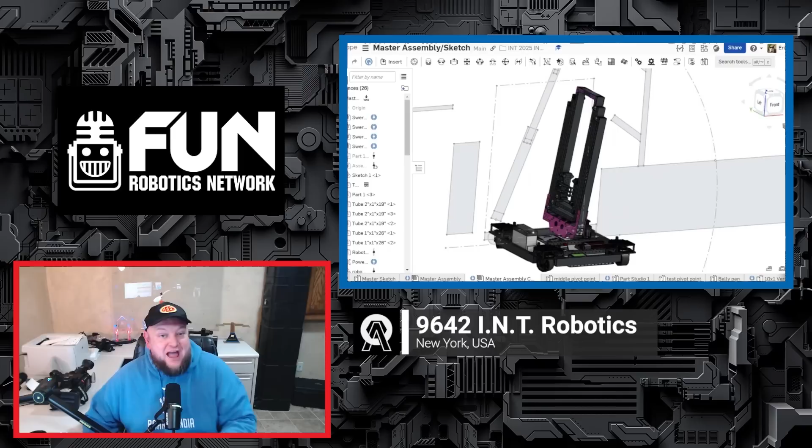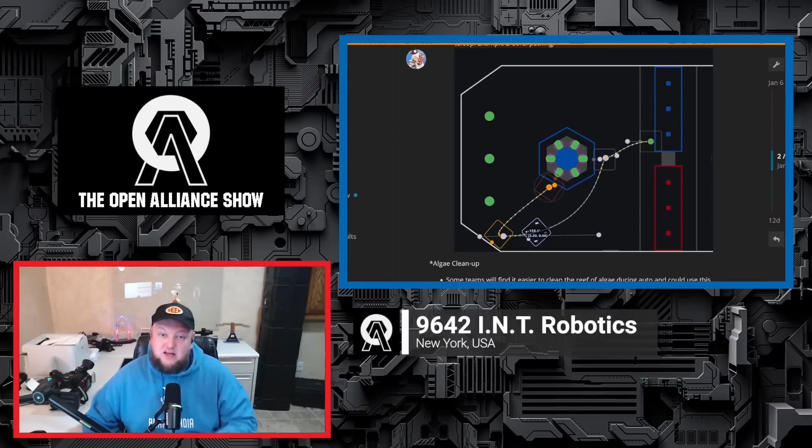They're also here for FRC as well, giving updates on what they've been doing for the REEFSCAPE game. This team definitely you would never assume is a second-year team. They are so well put together, and it's going to be really cool to dive into what they're doing. We're talking about their robot progress so far, an update on their chassis. They have a lot of great stuff in CAD we'll be diving into, plus some good concepts for their climber and where they're getting inspiration from. We also talk about their ideas for a neural network and custom vision setups. It's a lot of great stuff coming from INT Robotics out of New York. Let's learn more about their progress coming up here on the FRC Open Alliance Show.

Sure, my name is Andrew. I'm the co-captain of INT Robotics, and I cover CAD and mechanical. I'm the other co-captain of INT, I cover programming, machining, and electrical. My name is Darius, I'm the design and mechanical lead for INT Robotics. And my name is Eric.

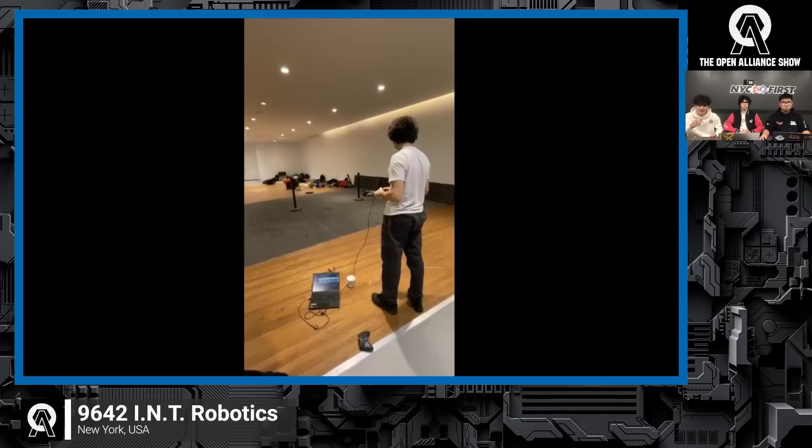Starting off, we just want to go back to day one. Once we saw the game, we immediately started creating a chassis. We started with a 27 by 27 chassis and got VersaFrame on the CNC as quick as we could. Then we built a full test chassis, which we have video of. These are actually new swerve modules we have, a lot faster than our old ones, and brand new instead of being used for multiple years. It's great to drive with a new chassis, and this allowed our programmer to get some testing early on in the season.

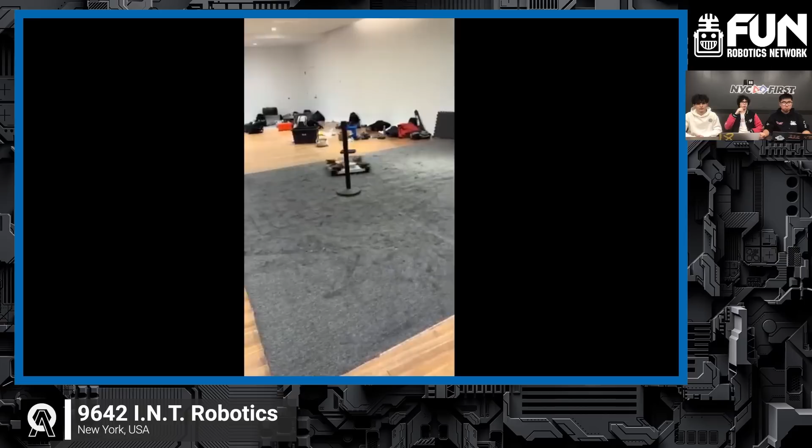Going more in depth into the chassis, because they're new not just for us but across FRC, these are the West Coast Products X2 Inverted modules. We're specifically using the X3 gear ratio. I believe we have the fastest gear ratio option, but right now we've geared them to the second fastest just because we want to see what it's all about. And as the video shows, it's pretty damn powerful.

So while Darius is working on the programming side of the robot, the rest of us split into different teams, working on different intake designs, different climber designs, and different versions of the chassis. We have a 27 by 27 and a 27 by 28. While people were working on the different intake designs, we narrowed it down to a couple, and same for the climber, we have a couple main options and one that we're leaning towards. So we'll move into the elevator system, which Eric will talk about.

Yeah, so kind of backtracking a little bit to our chassis.

So the test chassis that you saw in the video was a 27 by 27. But after further discussion with the team, we decided to finalize with a 28-inch by 20-inch chassis. The reason was we didn't see a need for such a large chassis this year, since there weren't many mechanisms we needed to cram into the space. 20 by 28 turned out to be a perfect middle ground, giving us enough room for all our mechanisms plus ample space for electronics.

Diving into our individual mechanisms, I want to first talk about our overall vision for the robot this year. When thinking about game strategy, we wanted to take on all the tasks, and our elevator was going to be the main system that allowed us to do that. So for the elevator, we decided to go with an internally belt-routed elevator.

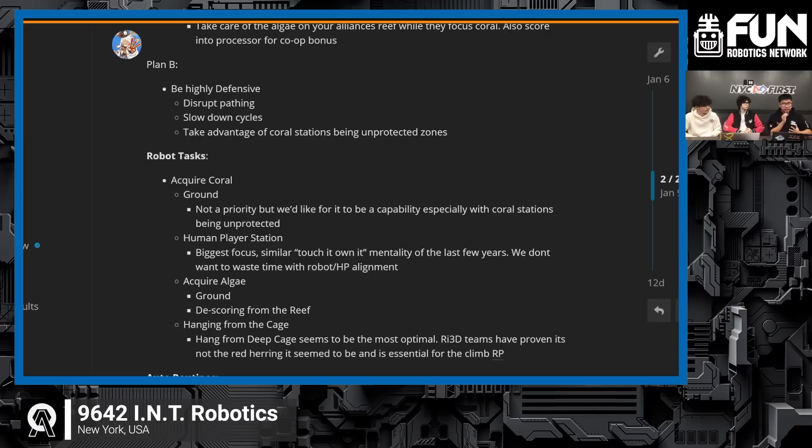There were a couple reasons for this decision. One of the main reasons was the weight—it's much lighter than a typical chain cascading elevator. This is significant because we realized we have less weight to work with this year, so we're being more mindful of weight, and that's one of the reasons we chose the belt elevator.

Another reason was its low maintenance. Once you tension all the belts and finalize everything, there isn't much you have to do to maintain it. It's low maintenance and gives us ease of mind when driving around.

Something I want to ask you guys—we were talking pre-show that you just got back from an FTC event, right? What's that transition like going from FTC to FRC in terms of pacing or strategy? You all do both, so what is that experience actually like?

It comes with its ups and its downs. I think we're much more organized than we were last year, our rookie year, since it was rookie year for both our FTC teams and our FRC team. That was very chaotic—we didn't get to where we are right now. We didn't even start building until about a month into build season.

Right now I think it's good. We've managed to organize our time because we have members of the FRC team who are native to their own FTC teams from schools that don't have FRC teams, which is why they compete with us in FTC. We found a system that works, and honestly I think it's more beneficial—besides the time constraints of giving up weekends for qualifiers and other FTC events.

It actually helps more, because from a programming perspective, the stuff I've done in vision for FTC, working at a smaller scale, is still all the same concepts. Everything I talked about in the earlier FTC Open Alliance segments is stuff I'm going to be implementing here in FRC.

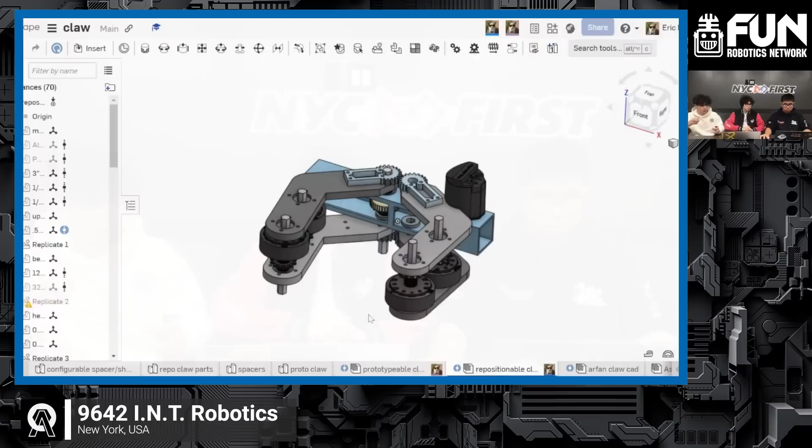What else do you want to cover? Moving into our different intake designs, we came down to two main ones. One of them has two rollers on either side, and it's able to open and close to adapt to the game piece.

The other one is more of a static design, so it more so pinches the game piece, the algae, the larger ball, when compared to the PVC pipe, where it gets intake nice and snug and the algae gets pinched in. So there are two different designs. They're pretty much the same type of concept, however, one of them is more adaptable to the different types of tasks. It might handle the ball easier. We haven't actually tested it physically, and that's what we're going to get to in the coming weeks. But these are our different designs in terms of CAD for our two intakes.

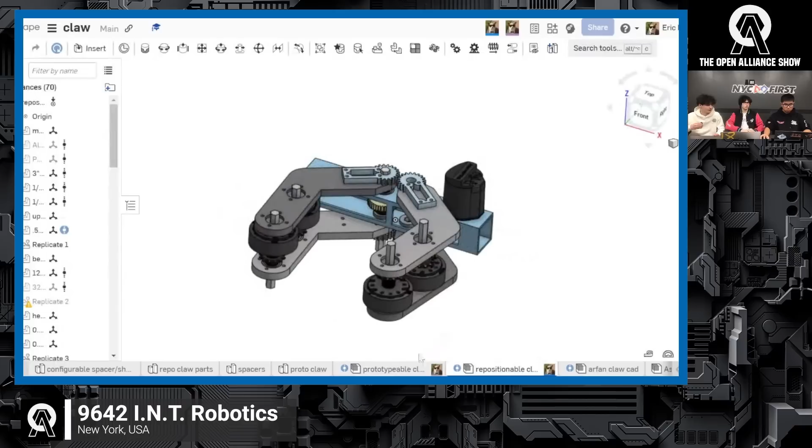And then if you want to move on to the climb or the elevator. So this is our differential, which Eric can talk about.

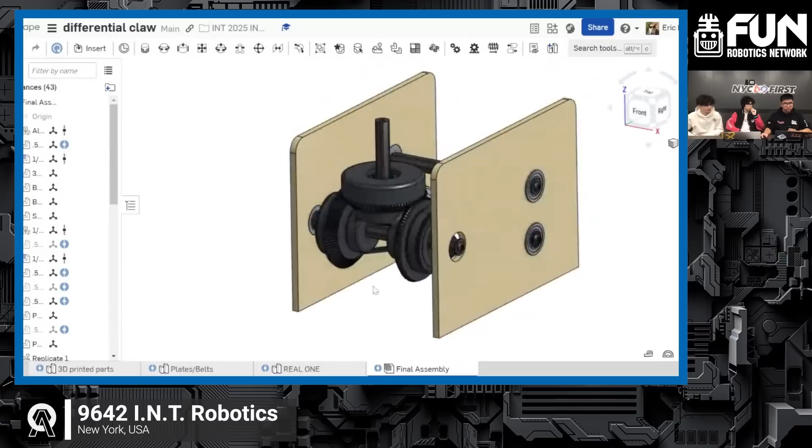Yeah, so another mechanism we were playing around with was a differential claw. I actually saw this design on Instagram one day, a team using a similar mechanism, and we designed an elementary version of this. We're still yet to test it, but we have high hopes because it's very compact, and we're able to have two degrees of motion. We have up and down, and we also have 360 degrees around this axis right here.

So this is our master assembly slash master sketch document, and here is where we do a lot of the planning and where we'll eventually visualize the final assembly of the robot. So here is our master sketch. Originally we decided to go with the elevator in the back, and the belt elevator would go to all four levels of the coral on the reef, and you can kind of see that here in the master assembly.

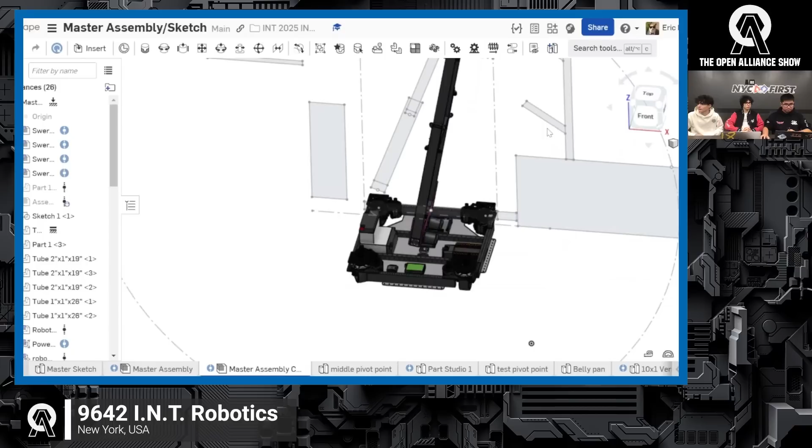With this elevator we're able to reach all four levels. So we have the top level here, we have that preset, and then when we need to go down, we would simply go down to the lower levels.

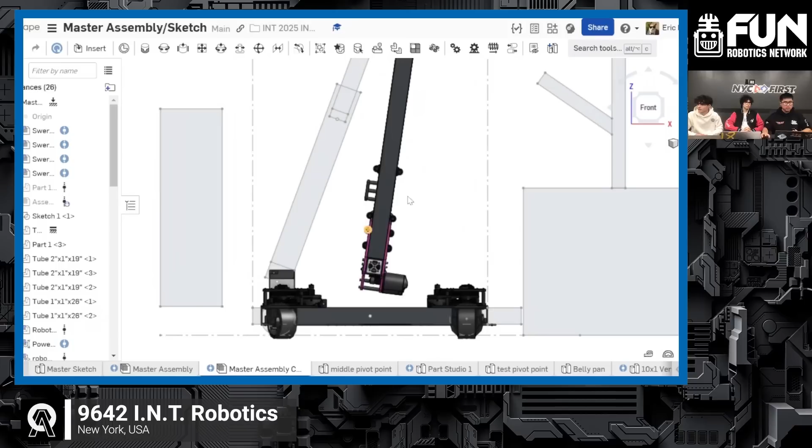And so forth. We also decided to put the elevator in the middle. As you can see before, we had the original idea of putting it in the back, but because of possible weight distribution issues, we figured that having it in the center would always establish that our center of mass is near the center and would prevent tipping.

Just to specifically reference a team we took inspiration from, we do agree that having the elevator pivot from the back would probably make for an easier time climbing because we have more leverage. But we're trying to think of auto and teleop as a whole. We don't want any sort of tippiness because we don't want to slow ourselves down just because if we move too fast while even slightly extended, we'll be tipping. That's not a problem we want to deal with.

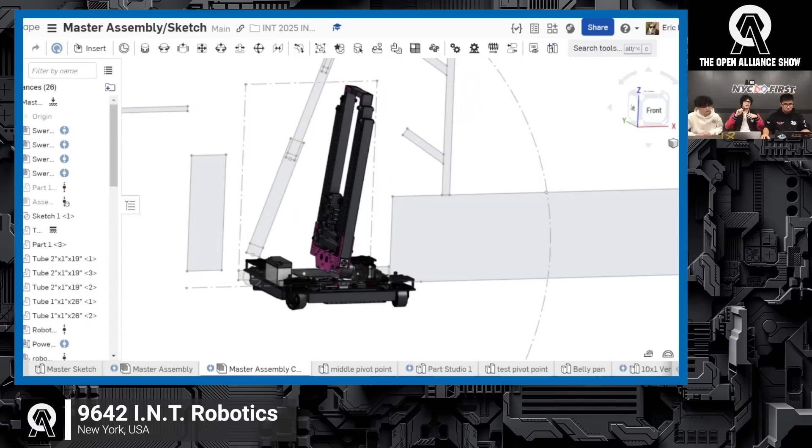But we've seen two robots, at least in 2023, successfully execute a similar concept, 1768 and 3015 Robo Rangers, I believe, where they had a pivoting telescoping arm in the middle of the robot. What I really liked about this design, obviously we're not going to go with a telescoping arm, we're going to port it to be compatible with an elevator. But what I personally liked about this design is that another goal we had is that we wanted ground intake.

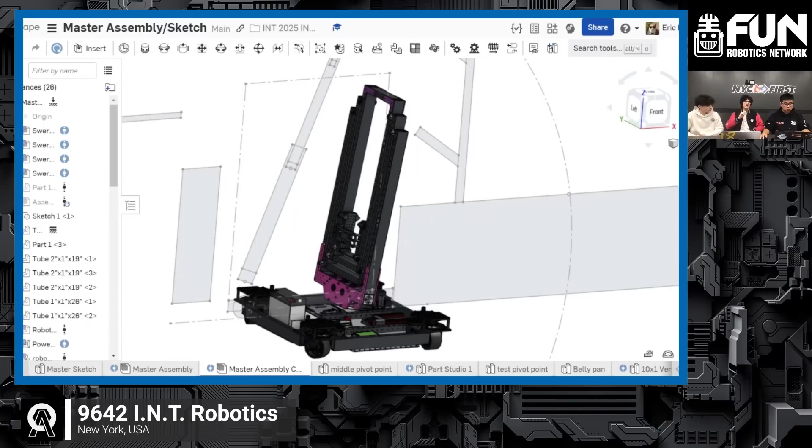While we understand that in some games, especially 2019 Deep Space, ground intake might have come off as a red herring, I don't think that's the case in this game, especially because the human player stations are not protected. So at higher levels of gameplay, especially at worlds, you're going to see people playing some crazy defense on the human player station, and we want an alternative where a human player just starts shooting out coral and they disperse in different directions. The person playing defense isn't going to be able to keep up with all of them. And we have the capability to, just like how 3015 did, pivot our elevator down.

Because the intake and the claw that we'll have will, at least, even if it's not through a differential, have 1 degree of motion where it can pitch itself up and down, we'd easily be able to pick up from the floor. And that wouldn't have to be a separate mechanism or anything like that. It's already synergizing well with our pre-existing mechanism of having a pivoting elevator.

So is that claw that you're designing, or the different options that you have, are those looking at picking up both algae and coral? Yeah, realistically speaking, we want to have something that can do algae and coral in the same string.

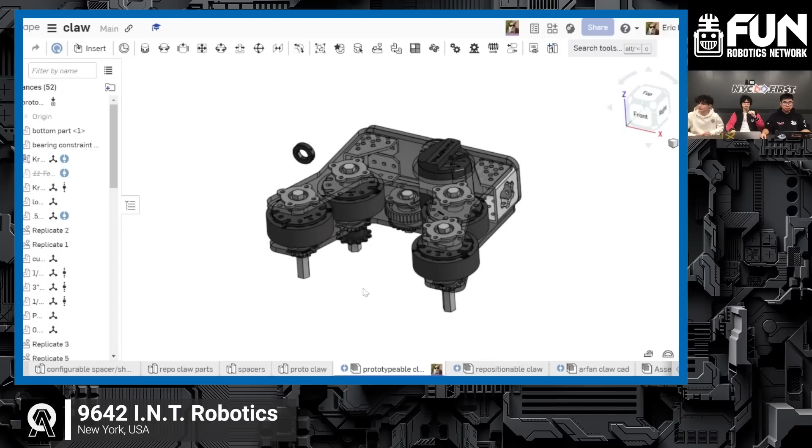Gotcha, so yeah, that'll be really interesting to see. I agree with you, I think floor pickup's going to have a lot of viability in the game, especially in later levels of it. I agree, as the way the meta evolves in this game, I think floor pickup's going to be a very valuable asset for teams to have as well too.

So yeah, cool price. Anything that you guys have considered in terms of climbing or anything like that yet? Yeah, so we also have a couple of climbing ideas in mind.

So one of them is actually inspired by a Lego robot that we saw very early in the build season. That one was pretty much using a conveyor system where the actual cage lands on top of your robot and you're clasping onto it, pulling yourself up with that, which we'll pull up real quick right now. This was something that we all saw very early on.

It was an idea that has now evolved into many different types, where we use the same type of wedge idea, but now since we have the elevator, which is on a pivot, we were able to have the ability to maybe use the elevator and have an actual clamp on the elevator to pull ourselves up using that instead.

So this is just a very early concept of something that we saw where we could take inspiration from. But now what we're moving towards is something where, if you go to the master sketch, we have something on the back of the elevator, clamps where we can wedge and use the weight of the robot to passively clamp onto the cage, and then we're able to tilt ourselves using the pivot from the bottom.

So that was our main climbing idea that we have for this robot, and that's something we're going to get working on next. Since we have the elevator assembly and everything else, everything just needs to be combined and put together.

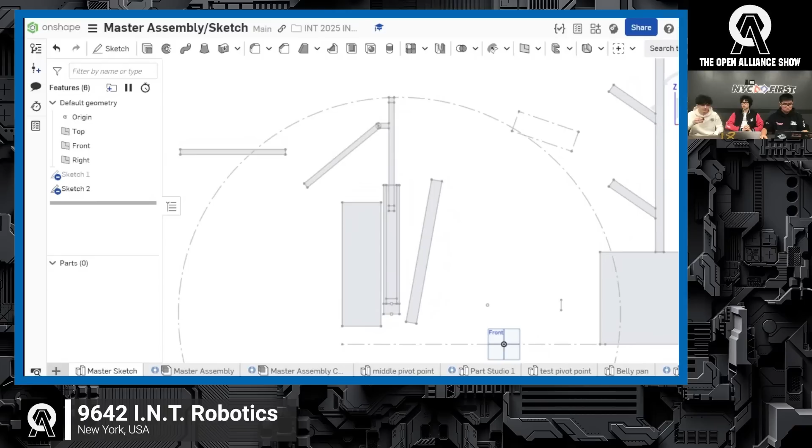And for your team, what is kind of the general time frame? Do you have certain deadlines that you're setting for your team, or is it just one of those like, hey, by the time we get to week 2, everything needs to be ready? What does that look like for INT?

So for INT, obviously, I think we operate in a bit more of a unique way because we have to be very conscious of all the FRC members, which is like 70-80% of FRC members who come from an FTC team. So for them, their FTC competition doesn't end till early March, which is the same time as our week 2 event. So we want to make sure that our deadlines are playing nice with each other and we aren't pushing people to prioritize one team over the other.

But for those of us, like for example Eric, who are strictly part of the FRC team, we're able to recognize these members and allow them to have a bit more lenient deadlines that are more oriented towards just FRC. So for example, we spent, I'd say, the first week with no finalized prototypes. We knew that we wanted an internally rigged continuous bow elevator, but we didn't know if we wanted it stationary, or to pivot from the back or middle.

So for example, what he worked on wasn't necessarily the finalization of its placement on the chassis, but more so the elevator itself. So now what we have is that we can make the final decision of, no matter whether we want it to be pivoting, stationary, middle, or back, we at least have the elevator, and with all the pulleys in place, we have all these specific things.

And that was a deadline that he set for himself by the end of week 1, which he reached. Now, as we're finishing week 2 and heading into week 3, all the claw designs you saw over there were also week 1 to 2 deadlines that were met.

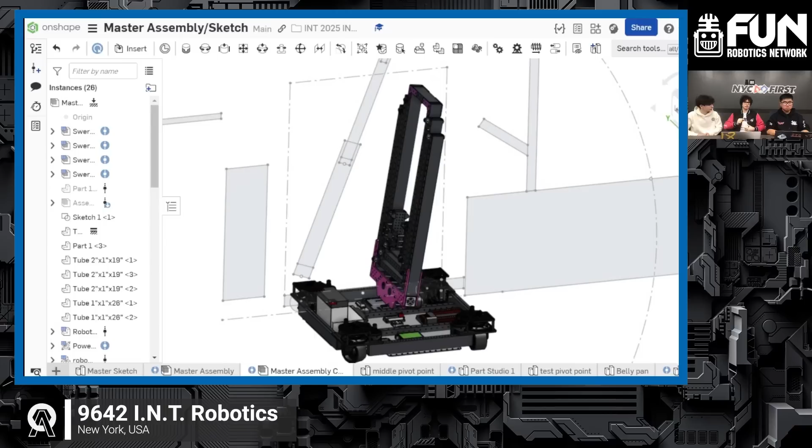Right now we're entering the physical phase, where we already know the design and idea behind our robot. It's more about physically assembling it and making sure all the parts work together. That's going to be the phase from week 3 to about week 4.

Yeah, that makes sense. I wanted to ask you about anything regarding vision on your robot, or autonomous routines, or anything like that. What do you want to wrap up with?

Oh yeah, so to wrap up the software side of things, which is what I handle—teams and people always say that the more seconds you can shave off a cycle, the more cycles you gain by the end of the match.

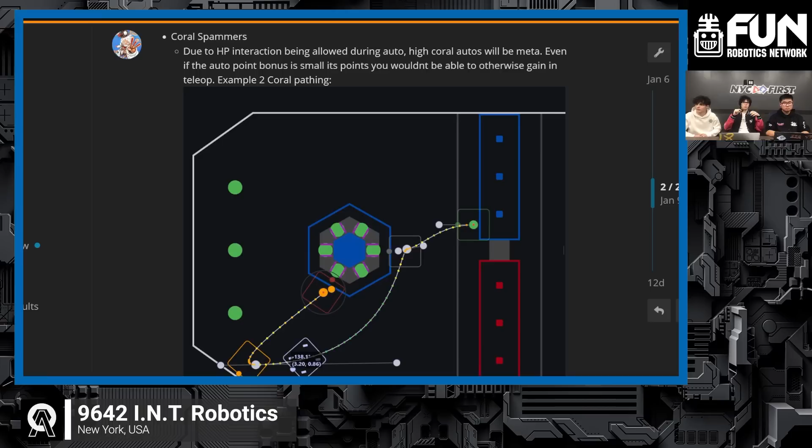I think this game truly exemplifies that, because with a game with full field cycles, shaving off 1 to 2 seconds per cycle only culminates in 1 to 2 extra cycles at the end. But now that it's more like half field cycles, you really notice a difference.

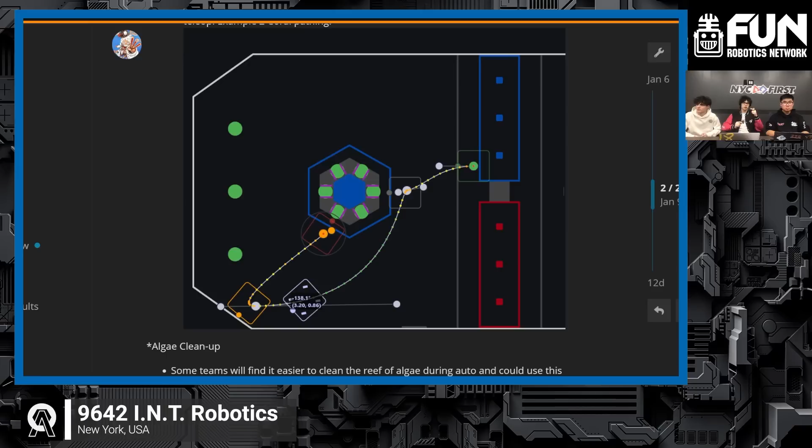As a driver, I never want to end up in a situation during a competition match where everything I'm doing is manual alignment. We want to be able to line up to the AprilTags at the human player station, and then from that AprilTag to the next one at the reef, have an automated sequence for scoring. To that end, we want to use all the vision opportunities that we can.

Right now, the vision setup I'm going for is two Arducams with Orange Pi co-processors, where we're planning to run Photon Vision on either the Arducams or the Limelight. Then on the claw itself, we want to run a Limelight 4 with the Hailo co-processor.

We want to run neural networks on the actual purple branches of the reef itself, because it's kind of like how UPS has this last mile policy—they'll ship a package to you by whatever method, but for that last mile to actually bring it to your home, they hand it off to someone who personally knows your neighborhood best.

We want to do that same thing, using a neural network to know the exact distance, because while the April tag is beautiful for rotation and translational offset, especially when we need to be flush against the reef to score, we're going to need something else that's not relying on April tags—that's where the neural network comes into play.

Specifically, the reason I want to use the Hailo accelerator is because it's going to help with the neural network—basically, if the Limelight 3 had the Google Coral, the Limelight 4 is going to have the Hailo.

And we have a Hailo-10H back home that we can play around with. So we believe that by the time the Limelight 4 and the Hailos get shipped out, we'll already have sufficient background knowledge to implement this as fast as possible, so we can actually achieve what we're trying to do here.

Well, I can't wait to see that, especially when we have you on next. If there's any progress on that, I think it'd be really cool to look at and dive a little deeper into as well.